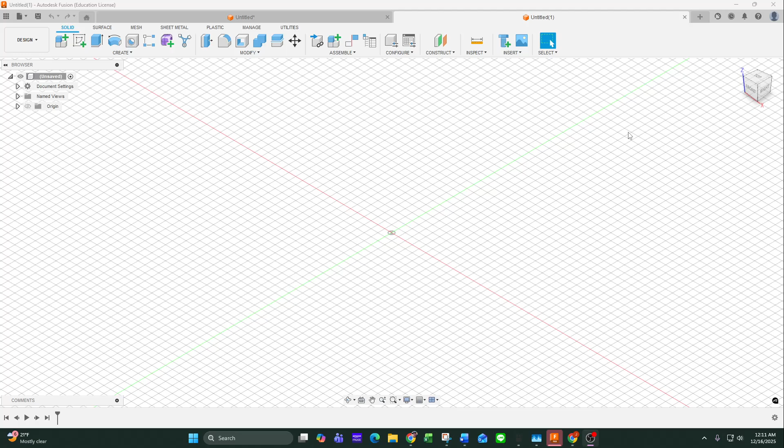Here's a nice, we'll call it quick and dirty fire in Fusion. Let's see, I'm going to start by drawing from the top down. While this wasn't part of the request, I just think it makes it look a little bit better. I'm going to start with a center point rectangle based off the origin, and I like a nice little square, so I'm going to go 90 millimeters by 90 millimeters.

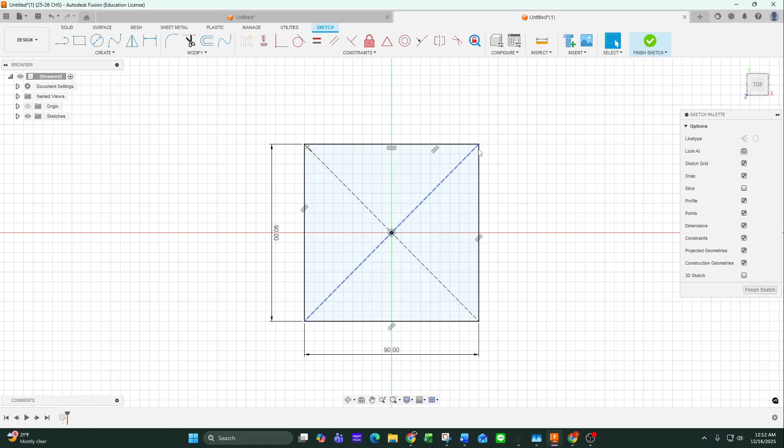This I'm just going to extrude a little bit, we'll call it 5 millimeters tall. ISO spin it a little bit. Let's see... that's good. Alright, so this will be the base. This is where the fire will be at.

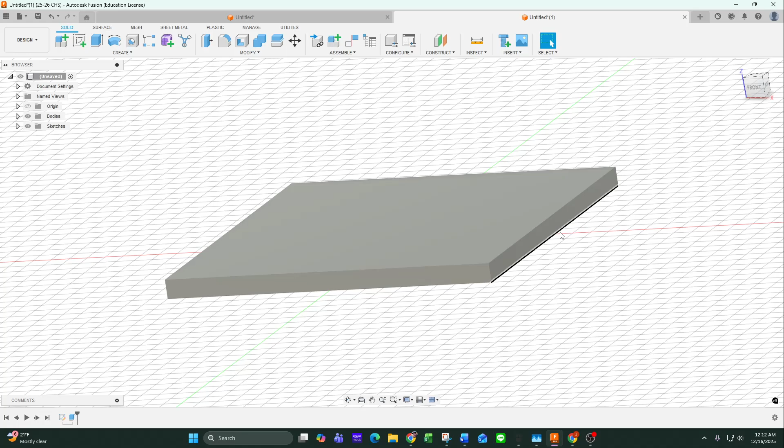Next thing I'm going to do is start drawing the flame. The way I kind of envision a fire looking is a handful of teardrop looking shapes, kind of with a circular pattern. So we'll start by drawing some vertical construction lines. Big flame in the middle, I'm just going to go straight up off the top, finish that construction line, and then do another one kind of over here. I can move it later if I need to, but it's a good jumping off point.

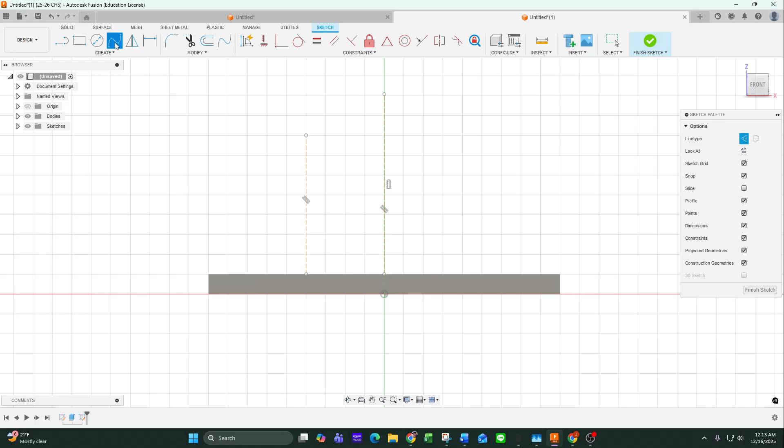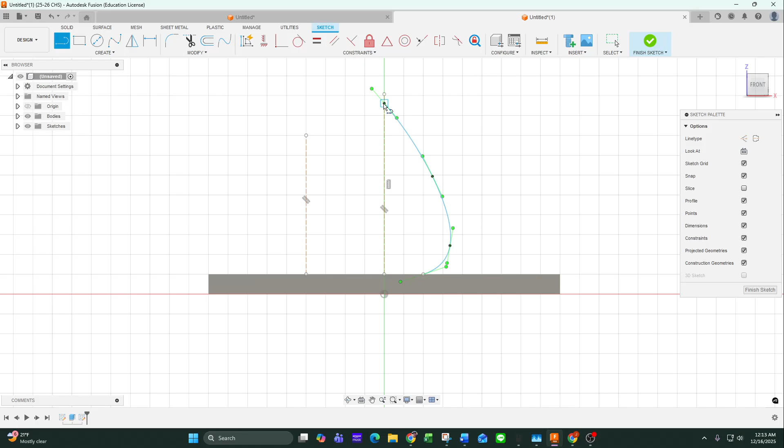Then I'm going to use the spline tool from the base of my piece of wood. I'm going to come out a little bit, turn it off construction - could have hit the X button to get out of construction - kind of give it a nice little curve, go up a little ways, and then make it connect to my construction line once I get to where I want it to look. Once I'm done, I'll close that out. I'm going to draw my vertical line right off my construction as well, and along the base as well. So now I've got my enclosed profile here.

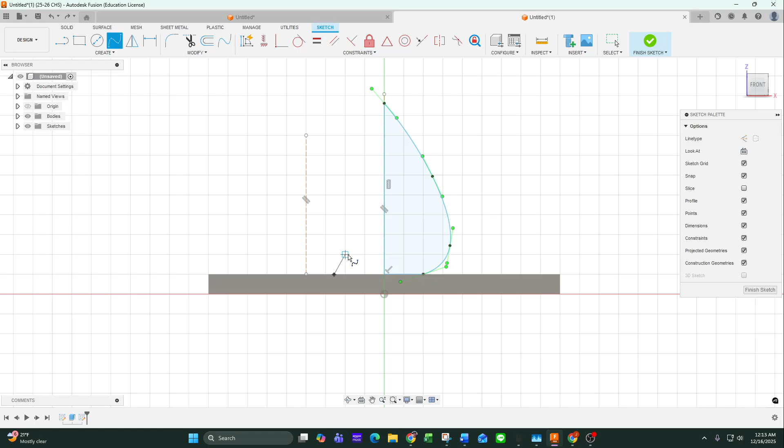I'm going to do another one here, a little bit smaller, similar concept with the spline - oh, nope, not the line tool, want the spline tool. So we're going to start with the base, give it a little bit of a curve, come up to my construction tool once again, get my vertical line going, and then close my shape at the end.

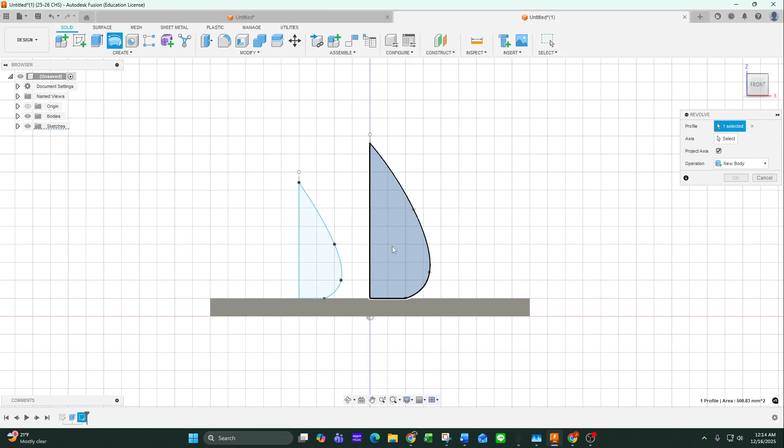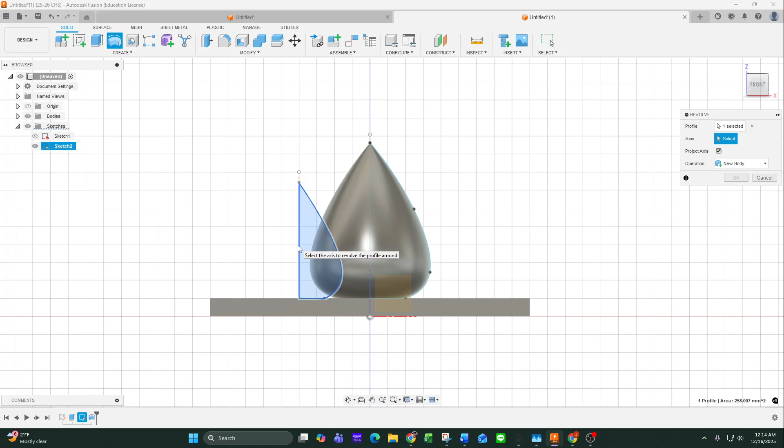Alright, so now I've got my shapes, general concepts. I'm now going to revolve the larger profile around the first construction axis. I'm good with that - actually, I don't want that to be a join, I want that to be a new body because I'm going to change the color afterwards. Oh, my sketch disappeared. We're going to revolve the other one, the smaller one, around my vertical axis here. I want this to be a new body as well.

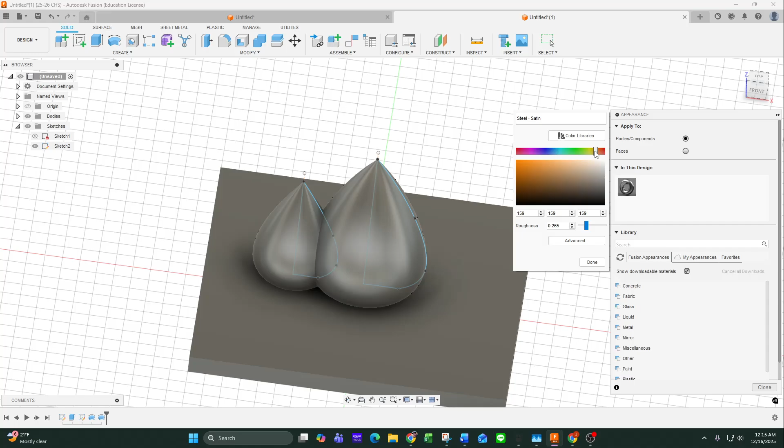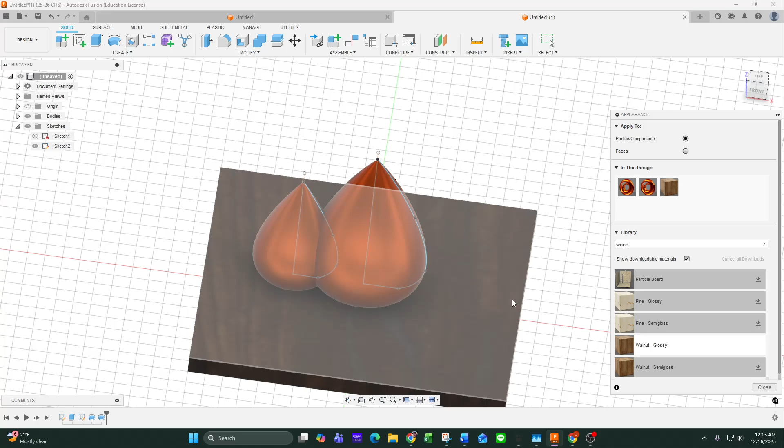Now I've got my general shapes. I'm just going to hit A for appearance to get some color going into these. I'm going to change the middle of my fire to be kind of a darker orange - I know it's steel, but - hit done. I'm going to add some wood to this, and I want my base down here to be a chunk of wood. I'm going to duplicate this orange, make the outer a little bit lighter in color, and put this on the smaller flame.

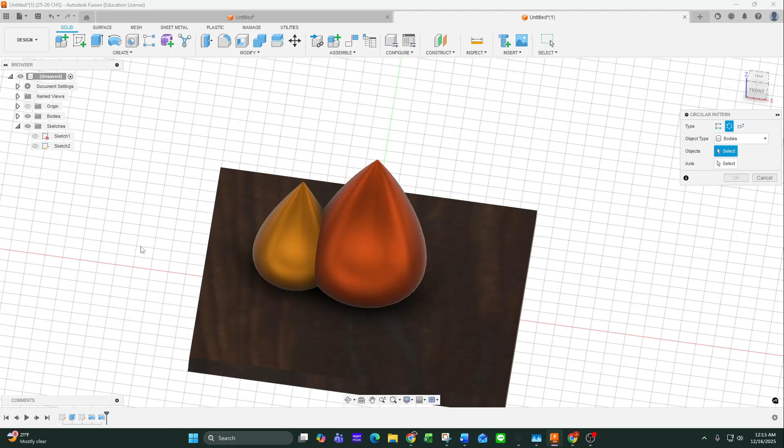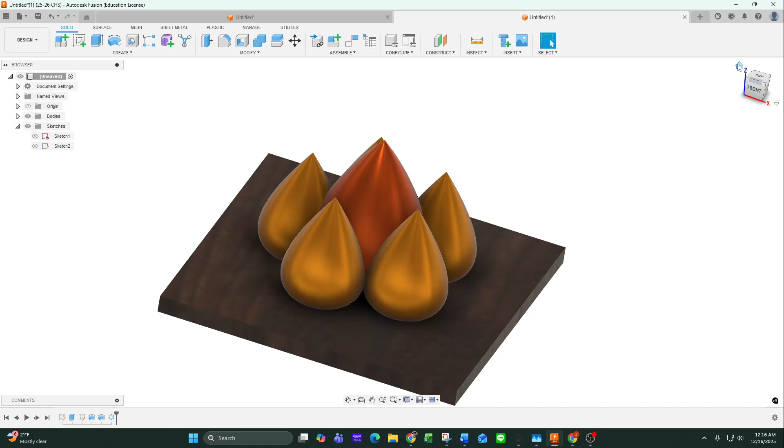I'm going to hide this sketch to make it look a little bit cleaner. So now I've kind of got the icon going a little bit. Now I'm going to create a circular pattern where I have the little flame going around this axis. Let's just go with 5, let's see how this looks. Gives me kind of that campfire flame look, and then I'm going to hide the grid just to clean it up. There we go - I feel like that's a pretty solid little campfire there.